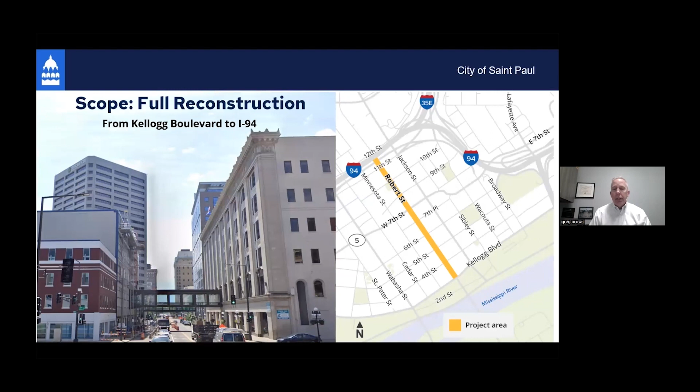Just a brief overview in case you're not familiar with the project: the Robert Street Reconstruction Project is a full reconstruction from Kellogg Boulevard to I-94, right through downtown St. Paul. That means basically starting from building face to building face, removing the sidewalks, curbs, and pavement, and reconstructing all of those elements.

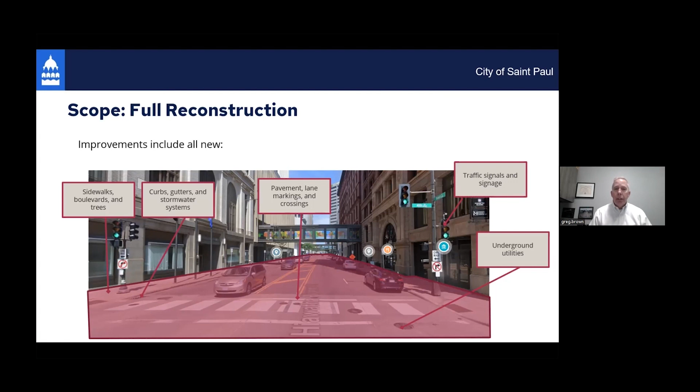In the process, we'll be updating underground utilities, both on the public side—things like sanitary sewer, water main, and storm sewer—and private utilities like Xcel Energy, Lumen, and other communications entities. We'll take advantage of the project to update their facilities and improve access and capabilities within the downtown corridor.

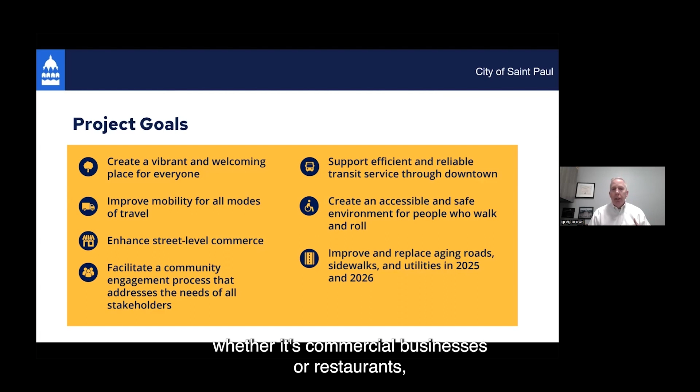The City of St. Paul has developed 7 key project goals. We would like to create a vibrant and welcoming place for everyone. We want to look at all the modes as far as function—pedestrians, transit, vehicles, trucks, etc. For street level commerce, whether commercial businesses, restaurants, or other entities on Robert Street, we want to enhance how they can function with the street or how the street can serve them.

We want to engage the community—this presentation is part of that. We want to make sure the community understands what the project can do for them, and we want to understand what issues, concerns, or improvements the community may have through the course of the project.

Transit is a big part of downtown St. Paul and Robert Street in particular. The project wants to support and enhance how that operates in the city.

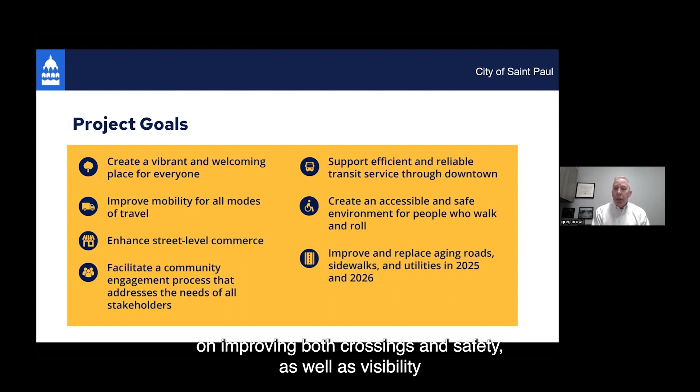A lot of our streets, not just in St. Paul but other urban areas, can be improved from the perspective of people with disabilities and accessibility challenges. The project will focus on improving crossings and safety, as well as visibility of pedestrians and people moving about the corridor to improve general safety.

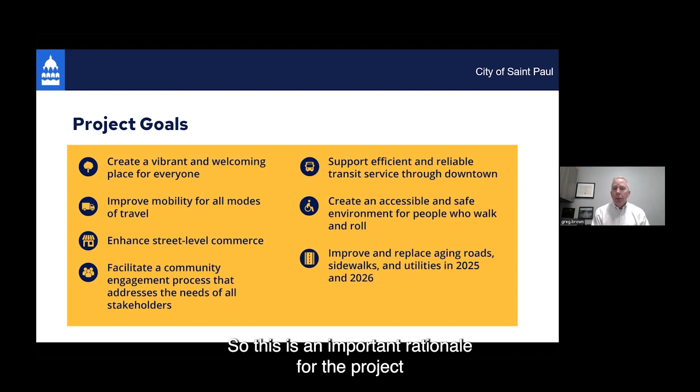Last but not least, Robert Street has not been reconstructed in any meaningful or holistic way for decades. This is important rationale for the project and will be incorporated at its core. Everything will be replaced on the surface from a pavement and sidewalk perspective, and underground facilities will be replaced as necessary to bring them up to date.

There are 4 city priorities we'd like to highlight: transit, which I alluded to in the goals; the pedestrian experience; positive partnerships—we want this to be a collaborative process with the community, stakeholders, and property owners; and climate resilience, which is an overall city goal that anything we do now with public works projects, we want to keep in mind and incorporate into our design thinking.

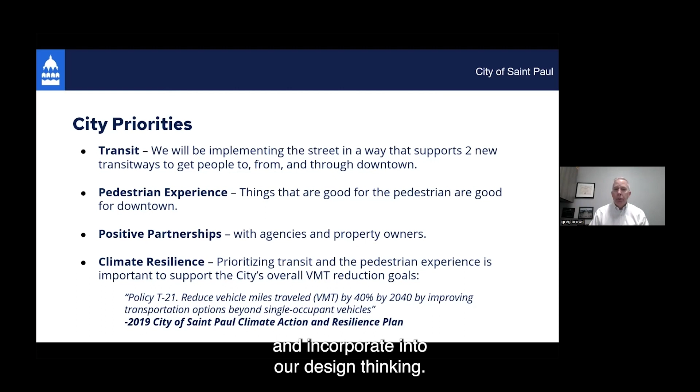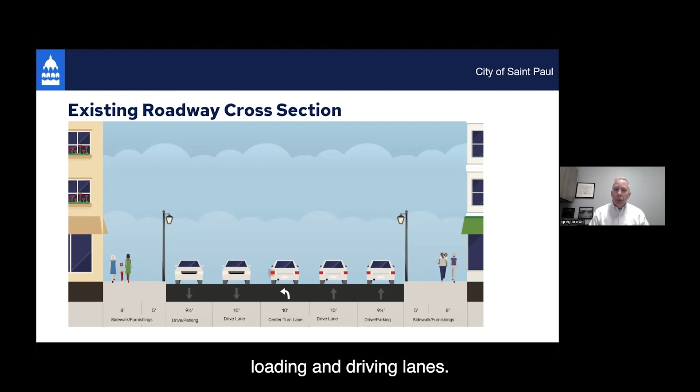Just a brief synopsis of the existing conditions: the existing roadway is configured generally as 5 lanes throughout most of the corridor. The center lane is a turn lane, the next two lanes are northbound and southbound, and the outside lanes are a combination of parking, loading, and driving lanes—sometimes off-peak parking and on-peak driving, but generally a combination of purposes.

Beyond the curb, from the building to the curb, is typically about 13 feet throughout the corridor, generally paved sidewalk area. There are some landscaping enhancements throughout the corridor, but it's generally sidewalk space that's utilized in that area.

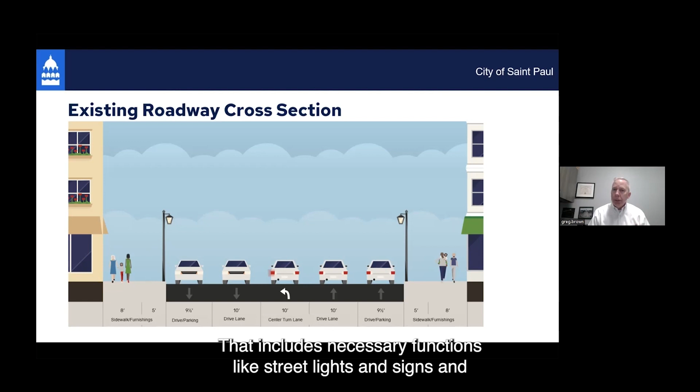That includes necessary functions like streetlights and signs, and miscellaneous elements that you'll find in the urban environment. So this presentation wants to outline 3 general design options that we'd like to get feedback on for Robert Street.

We'll go over those options in a minute, but I want to bring up a couple points to consider as we move along. This is very early—really our first exposure to the public of these 3 basic options. Things like lane widths are still in flux, exactly how the curb and gutter is designed, and traffic management details including parking bays, pull-outs for transit stops, lengths of turn lanes—all those things are details that will be fleshed out.

The intent of this overview and this session of feedback is to really think about the basic building blocks of the alternatives we're going to talk about. As we move forward and gravitate maybe towards one or two of these alternatives, we'll be looking at some of those finer points of lane widths and things to better fine-tune the alternatives.

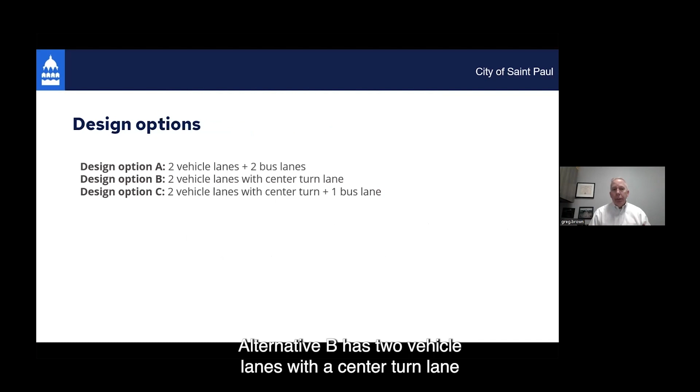So we've identified them as alternative A, B, and C. Alternative A includes 2 vehicle lanes and 2 bus lanes. Alternative B has 2 vehicle lanes with a center turn lane. Alternative C is really a hybrid of A and B—it's got the 2 vehicle lanes with a center turn lane, and then 1 bus lane, which we're depicting in the northbound direction.

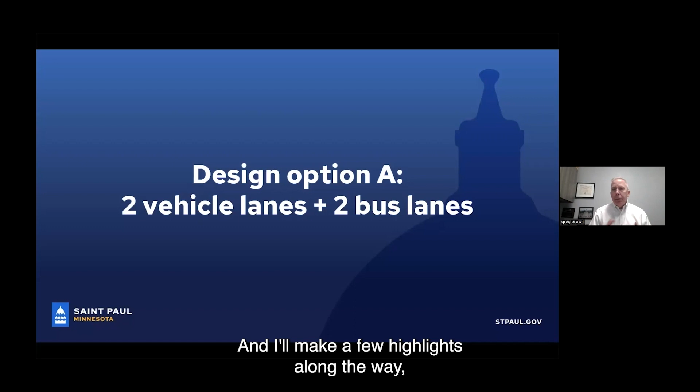So the next series of slides is a series of cross sections and plan views, block by block, of design option A. I'll make a few highlights along the way, but I invite everyone to utilize the materials on the website to look at more details from your perspective.

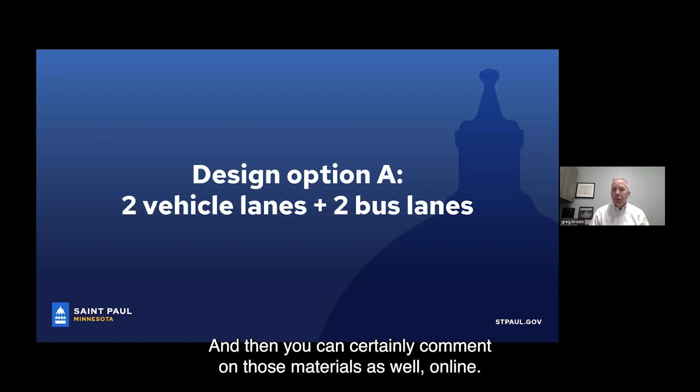If you're a building owner or resident who lives on the corridor, you might be more interested in the block from 10th to 11th and the southern blocks, and you'll be able to zoom into that if you look at the online materials, and you can certainly comment on those materials online. So we're going to work our way from north to south in all these options.

So I mentioned option A is a 4-lane design. The center 2 lanes have a northbound and a southbound traffic lane. The outside lanes are dedicated for bus traffic, and they're also allowed for use as right-turning lanes for right-turning vehicles.

Then the space beyond those bus lanes is a combination of things. It could be used for pedestrian walks, sidewalks, which would certainly be one of the functions. It could be used for transit stops, shelter platforms. It could be used for green space, maybe the addition of trees, bike racks, or things like sidewalk cafes. There's already some of that currently between 9th and 10th along the Rossmor frontage. So it's a variety of uses.

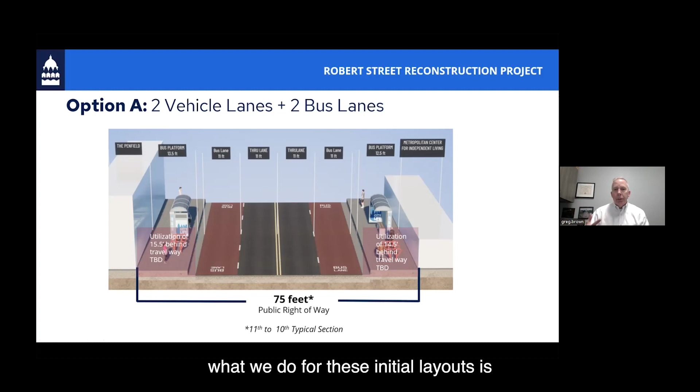I bring that up in that what we do for these initial layouts is probably a little simplistic and general in nature, but in any given block we could do different things in the space behind the traveled way. Some options might have a little bit more room, or some blocks might have a little bit more room than others on those. Parking and loading is another feature of those spaces that we would accommodate.

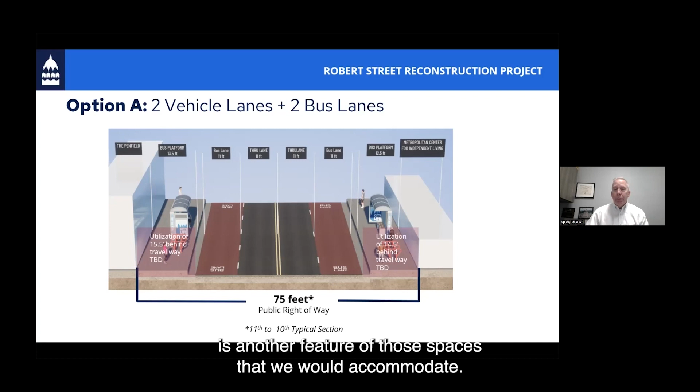And you'll see throughout these layouts some potential parking and loading areas that we've identified, playing off of existing uses that are in those locations.

This first example, which again we're working our way north to south, 11th to 10th—it's got a lot of information on it. That's why I encourage everyone to use the website to do a more thorough look, but I want to highlight a few things that will be helpful as you navigate through these.

The main roadway itself generally will have gray hatching for traffic lanes. It will have the salmon color if there's a dedicated bus lane in an option. Transit platforms that we know will be incorporated in some shape or form, not necessarily as depicted here, but in these general locations, are the light blue color.

Behind the curb, we have two general colors. We have a cream color, which represents a clear walkway—one that doesn't have lights or other impediments, trees, those kinds of things in it. The tan color represents the area we call an amenity zone, and those are spaces that could be used for all kinds of things like lighting, bike racks, trees, green space, water quality features. That's kind of undefined at this point, other than the fact that we've identified approximate spaces that can be used for it.

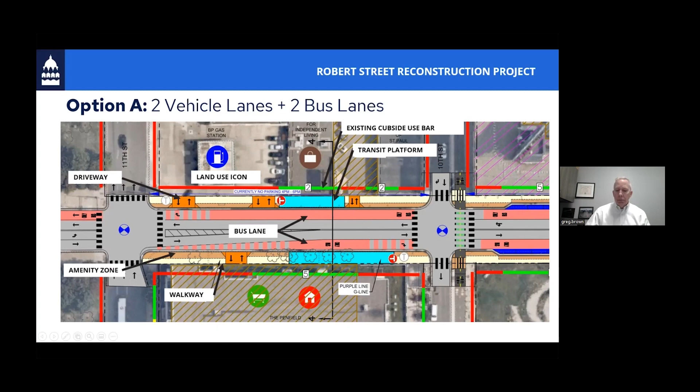We also generally envision reconstructing a little bit into the side streets, in this case 10th Street, so you'll see some coloring on those side streets, and the exact extents will be determined as we go along. Now that I've covered the orientation, we'll try to move a bit faster, knowing you can come back to this recording or go to the website to zoom in on details.

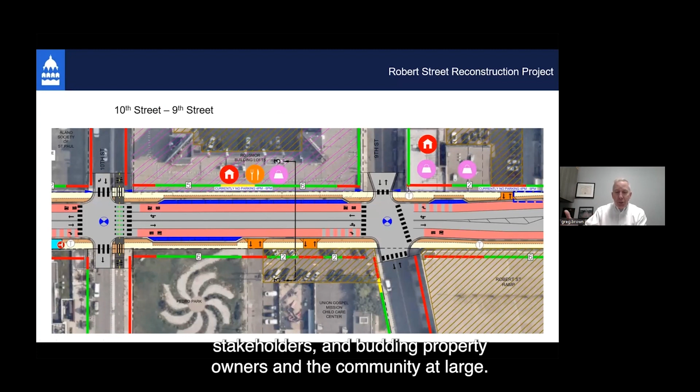In the case of a parking bay here, you can see the walking space gets a little constricted compared to the other side of the road. So these are all kinds of trade-offs and comparisons we'll be looking at with our partners, both stakeholders and abutting property owners and the community at large. There are a lot of interesting opportunities the project presents to the community, and those are the things we really want feedback on during this stage of engagement.

So this is the plan view section of that block. Something I want to point out here is this deep blue hatching, which represents a potential parking bay or loading zone. In this case it's just depicted as the same color, but it could be delineated however people want. It could be smaller than this, or it could be removed entirely to present more space for sidewalk cafe, say in the Rossmor block, or other uses.

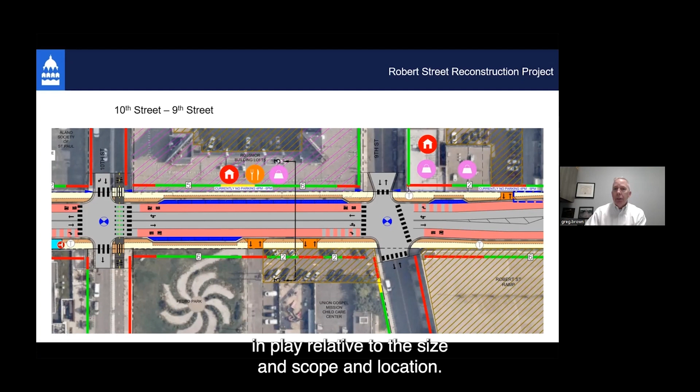So those are things all in play relative to size, scope, and location. But we wanted to depict some of those to get feedback and comments from people on what might be more important than other things.

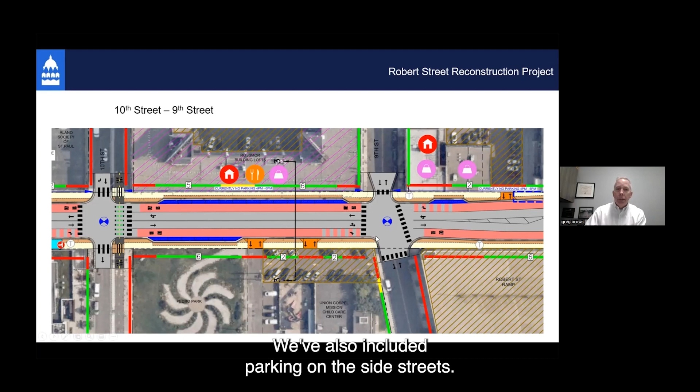Again, here's a bay where the parking and loading zone is. In the case of this block, the center of the block on the east has some loading zone and short-term parking on it. We've also included parking on the side streets, so you get a sense of what might be happening in those locations.

So working our way south, the next block between 9th and 7th includes the four-lane section as before, with a very similar configuration on the sidewalk. Again, we've shown a parking bay on the east side to see how that might relate. And this is that section in plan view, with a little bit of the parking bay depicted here.

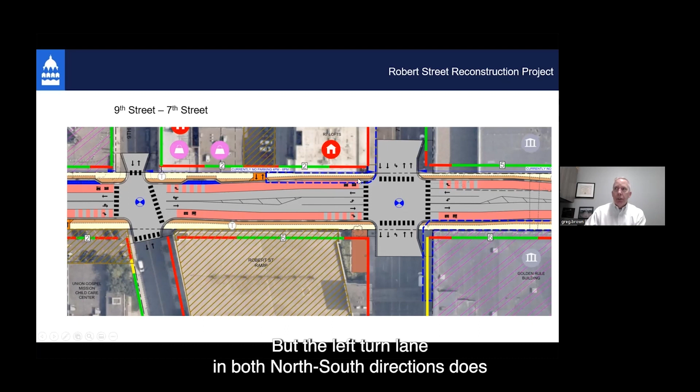Something occurring in this layout as we approach 7th Street is a widening of the roadway to account for a left turn lane. 7th and Robert is a very busy intersection, so we feel left turn lanes are going to be important to keep traffic functioning. But the left turn lane in both the north-south directions does add stress to the sidewalk and pedestrian environment.

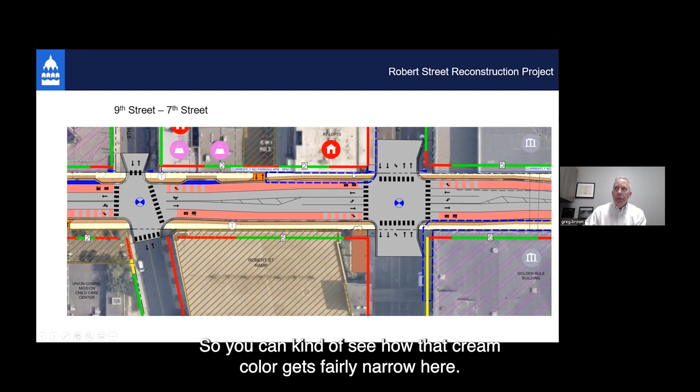You can see how that cream color gets fairly narrow here. We have it somewhat consistent here, but the tan area gets a little bit narrower. That's a trade-off we need to understand more as we go forward on the 7th and Robert intersection. In this particular option, there generally aren't left turn lanes, so this is a case where things are a little different than the normal option A footprint.

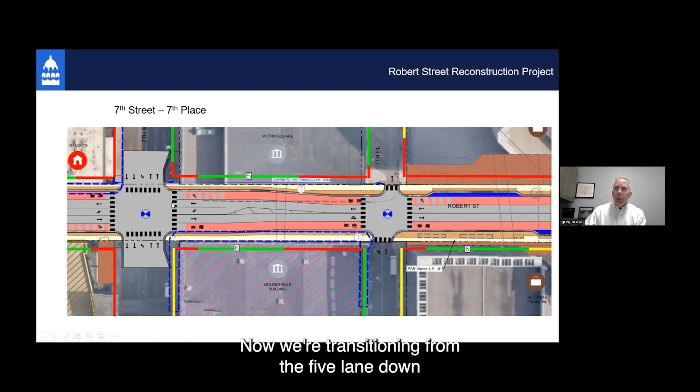Continuing south, this is the left turn lane approaching 7th here depicted. It's in effect a 5-lane section, with walkways and amenity zones on either side of the roadway. This is that block in plan view. Now we're transitioning from the 5-lane down to our standard option.

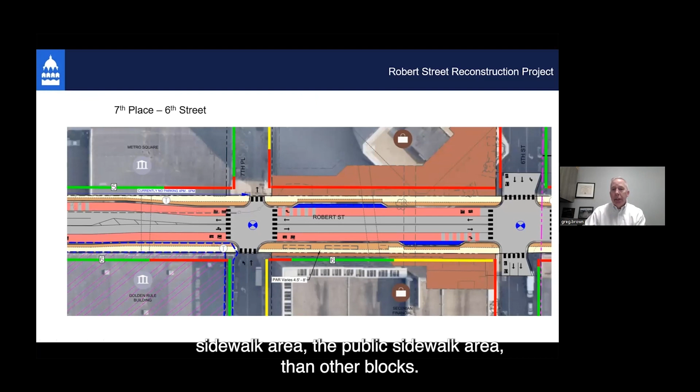The next block south, 7th Place to 6th Street, is fairly consistent on the main core layout, but depicts a parking bay on the east side. Something of interest in this block is that the Securian properties on both east and west are a little more set back from the public sidewalk area than other blocks, providing a more spacious feel from a pedestrian's perspective than blocks with buildings right on the corner or property line.

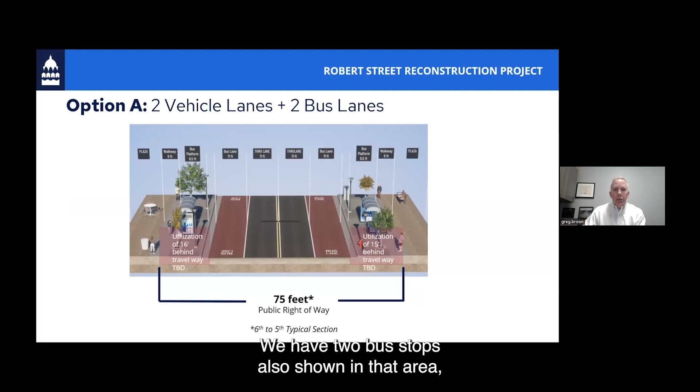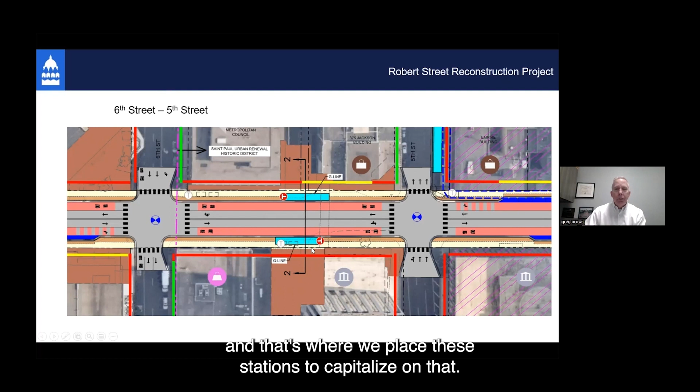We have 2 bus stops shown in that area, capitalizing on that space—that light blue hatch we talked about early on, a stop identified for the future G Line transit. This darker brown represents space that's not in the roadway right of way proper, but could be utilized and currently is used for walking and pedestrian movements.

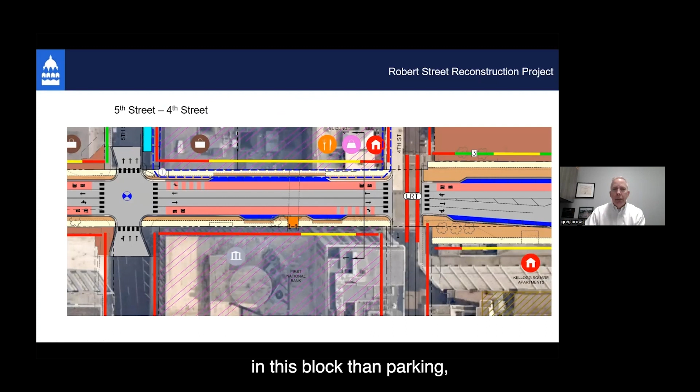So that occurs on both sides of the roadway, and that's where we've placed these stations to capitalize on that. The next block south, from 5th to 4th, is the Pioneer Endicott building and the First National Bank on either side. We've got parking bays shown here in conceptual form on each side—there's a need for that expressed along the way that does exist. Generally it's more of a loading zone focus in this block than parking, but it's something we'll be working with those property owners on and would like feedback from the community.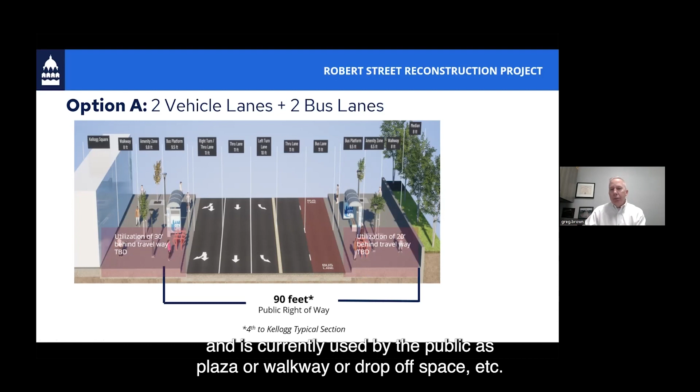Beyond the 90 feet, both sides of the road—on the federal side and the Kellogg Square side—have additional space that's usable and currently used by the public as plaza, walkway, or drop-off space. So this block is quite spacious compared to the rest of the corridor, and it's another block identified for transit stops. We have G-Line platforms shown right at the Kellogg Boulevard intersection area. That's the southern end of our project.

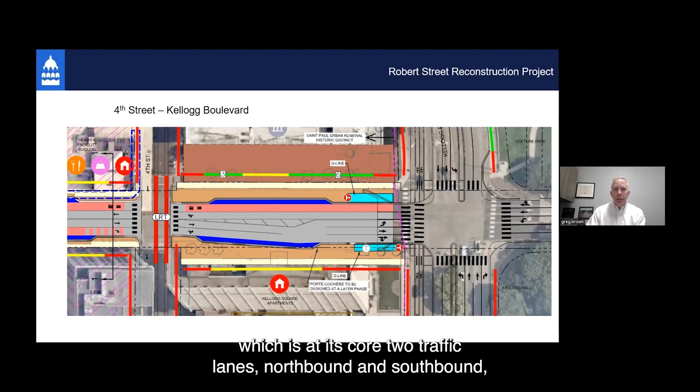As I mentioned, we go from Kellogg to 11th Street. This is option A, which at its core has 2 traffic lanes—a northbound and southbound—and 2 dedicated bus lanes. So we'll move now to option B, which is 2 vehicle lanes and a center turn lane, with no dedicated transit lanes.

The first section here is a transitional block from 11th to 10th. In this particular block we don't actually have a center turn lane because of the one-way nature of 10th Street and 11th Street, but we'll be transitioning to that in the next block.

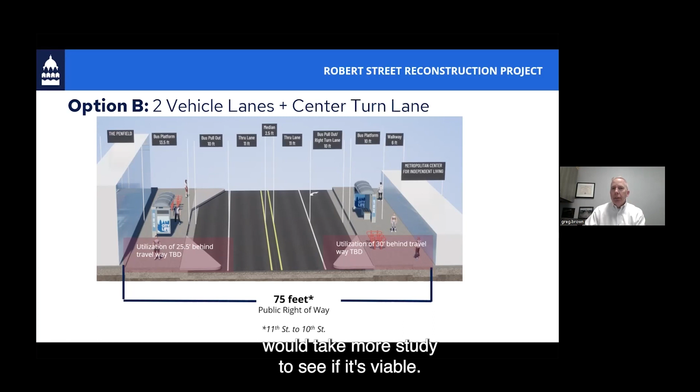We have the Purple Line and G Line bus stations and bus stops depicted here. I'd note that on this particular concept, generally at bus stops we've shown them designed with bus pullouts. That's a topic we're working and discussing with Metro Transit—it's a non-typical design for bus rapid transit, so it will take more study to see if it's viable, but we wanted to look at it to see how it fit from a spatial perspective.

This concept generally has those bus stations outside of the southbound and northbound travel way. In plan view, you can see we have the single northbound and southbound lanes, along with that narrow median depicted in the section, and we transition across 10th Street to the 3-lane core section defined by option B.

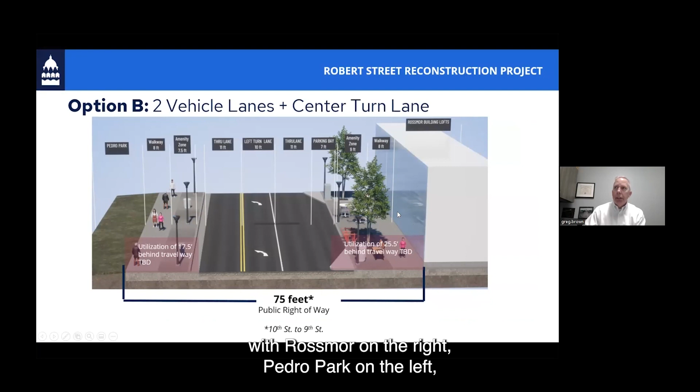So this next cross section is 10th to 9th, with Rossmor on the right, Pedro Park on the left. You can see more of the core section, and we have a parking bay depicted on the Rossmor side.

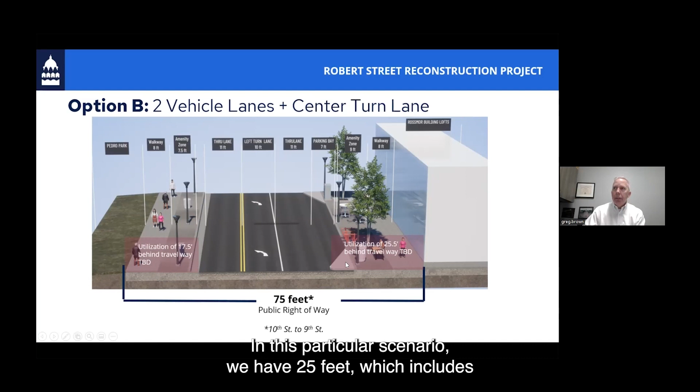One of the things you'll generally notice with option B is more pedestrian space from the roadway proper to the right of way. In this case, we have about 17 feet on the west side, and 25 feet on the other side, which includes a parking bay and some amenity zone. What's depicted here is chairs and tables for a sidewalk cafe and a walkway adjacent to the Rossmor building.

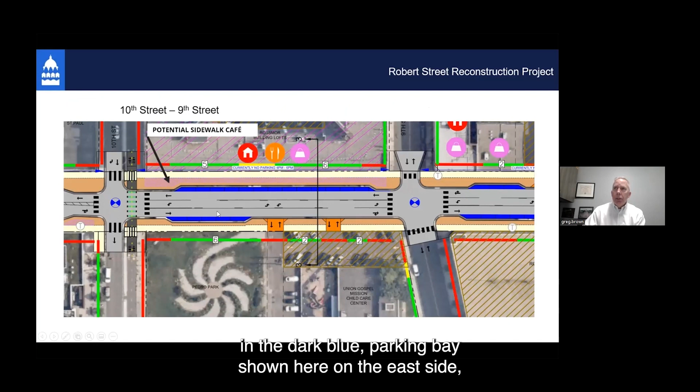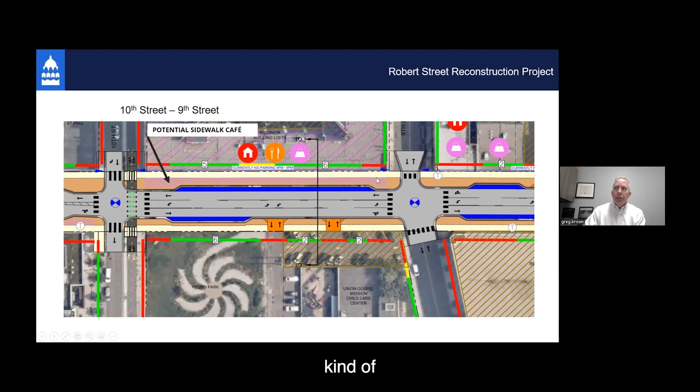So in plan view, you can see the parking bay here in the dark blue, shown on the east side. It's Pedro Park, the salmon or cream color is the clear walkway, and this hatched area is labeled as potential sidewalk cafe, but it's a fairly broad space compared to option A. That would be somewhat typical as we compare options A, B, and C. Option B generally has more space from curb to building than the other options.

Moving south, the next block from 9th to 7th, again we have our core section, parking bays on the other side, and then our amenity zone and clear walk space.

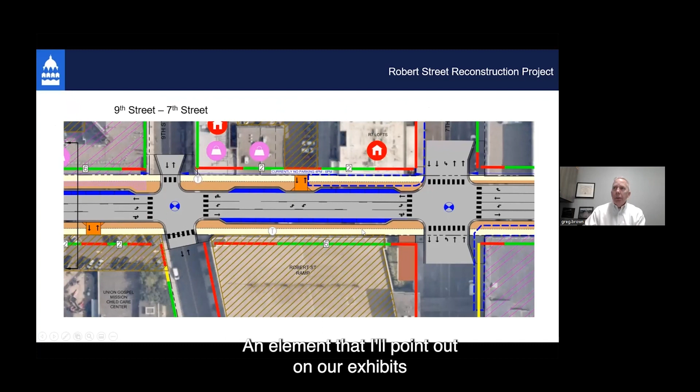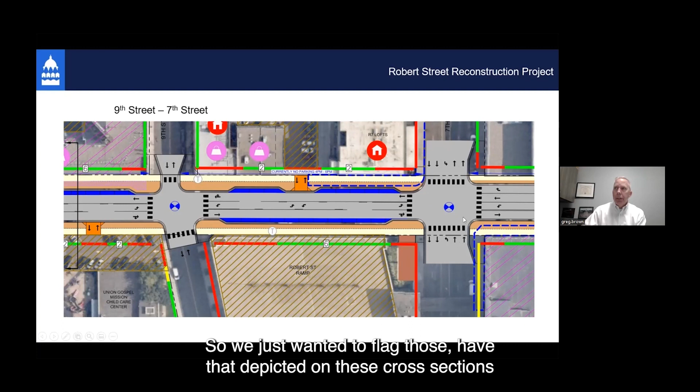An element I'll point out on our exhibits includes dark blue dashed lines in a few selected locations. Those represent things we're aware of at this point, and we're still in the process of learning from property owners, but these represent areaways, and in this case a heated sidewalk, that are elements that would present more challenge from an engineering design perspective to work around or build around. We just wanted to flag those and have them depicted on these cross sections and plan views for background knowledge.

Moving south, we are here at 7th Street to 7th Place. One of the things you'll see on the next layout is the development of a right turn lane. Just as option A had right turn lanes built in through the bus lanes but not left turn lanes, option B has left turn lanes built in but not right turn lanes.

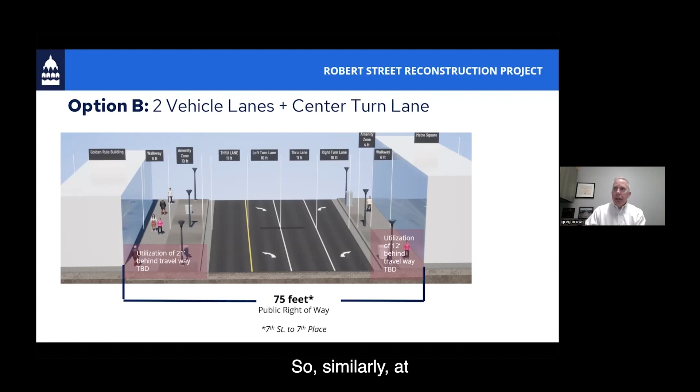Similarly at 7th Street, because of the busy nature of 7th Street, we believe we need a dedicated right turn lane. So we've actually widened this design on the northbound approach to provide that right turn lane, which is what you saw in that section. We also have one of the bus stops here utilizing that space as well.

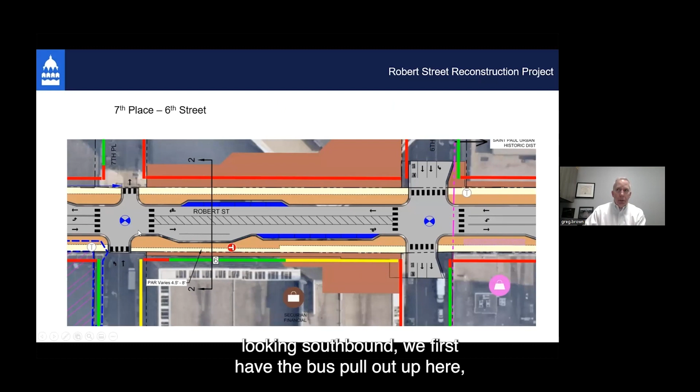The next block down, from 7th Place to 6th Street, the Securian block, has the 3-lane section, and we have parking bays and a bus pullout identified in this block. Looking at that in plan view, looking southbound, we first have the bus pullout, and then south of that we have some space shown for parking and loading. Northbound also has some parking and loading space.

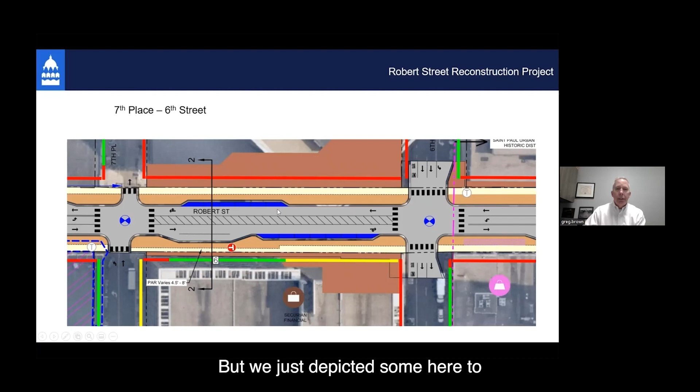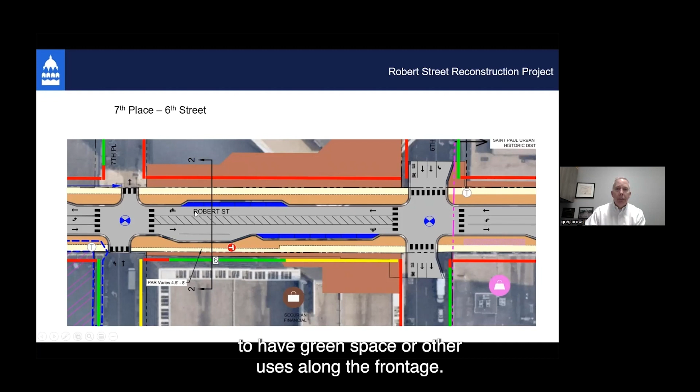There's actually no parking in the current northbound side of the Securian block, but we just depicted some here to solicit feedback, frankly, from the community and property owners to see if that has merit or if there's more of a preference to have green space or other uses along the frontage.

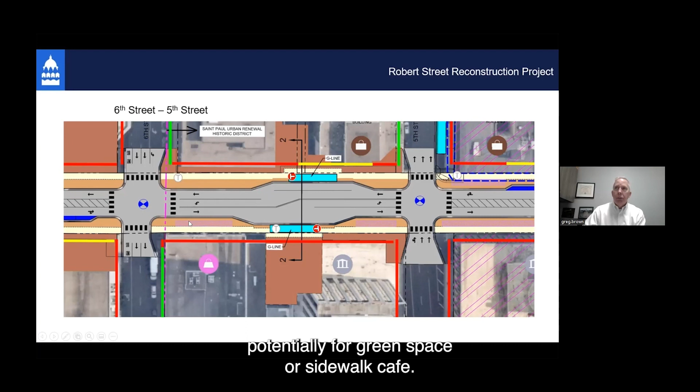The next block, similar to option A, we're capitalizing on the middle of that block with the public space that exists outside of the right of way. We have the bus stops for the G line depicted here. In plan view, you can see there's a pullout to facilitate those bus stops, and outside of that, space that could potentially be used for green space or sidewalk cafe. It's a fairly wide expanse from the curb to the building outside of the middle of the block.

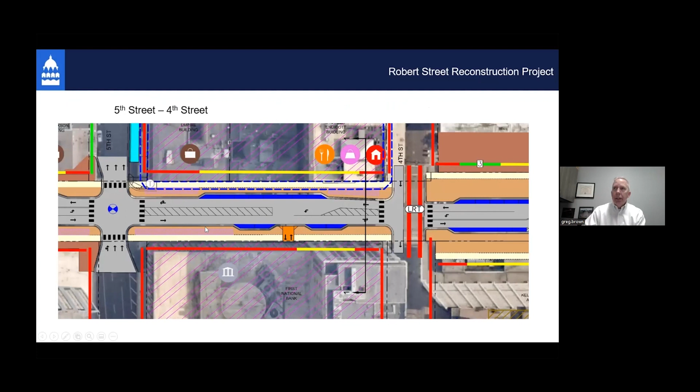Looking at that in plan view, we have some parking shown on the east side and some on the west side. Again, in this option, there's a fair amount of space between the curb and the building that could be used for multiple functions, including cafes or just additional green space, etc. That's depicted by these light purple hatches.

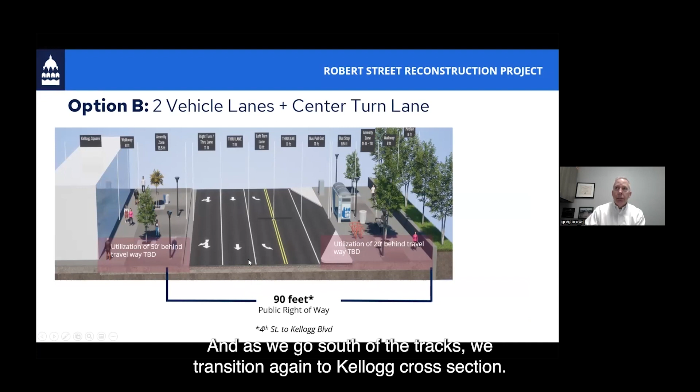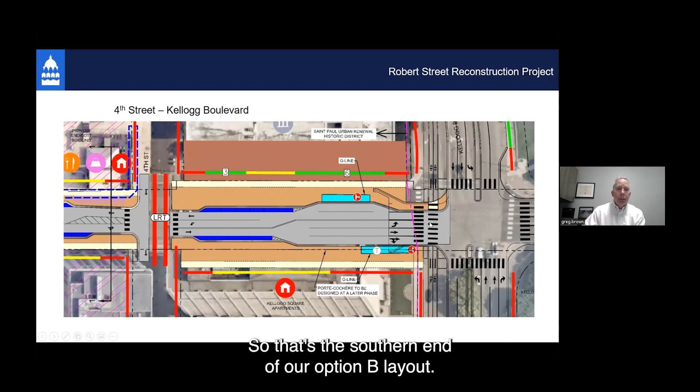As we go south of the tracks, we transition again to the Kellogg cross section. So this block, just like in option A, is a little bit different than the others. We transition here, and we do have our 2 transit stops at Kellogg. We have our lanes, both a through-left and a through-right on southbound, and a single through northbound depicted in this option, along with some parking or drop-off space that could be allocated on either side. So that's the southern end of our option B layout.

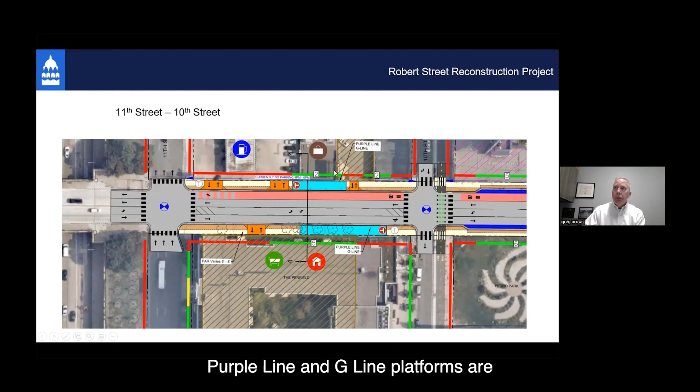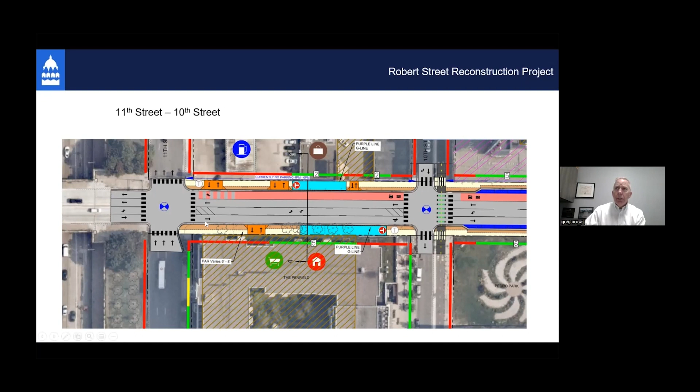The third option is option C. As I mentioned, that's kind of a hybrid of A and B. It's got a 3-lane general purpose traffic design and a single northbound bus lane in this concept. We could consider that bus lane to also be southbound, but we've depicted it northbound for the purposes of this discussion. In our first block, working from 11th Street south, you can see again the 2 purple line and G line platforms, very similar to option A. A lot of things in option C are very similar to option A from a spatial perspective. The general curb dimension, curb to curb, is very similar, so a lot of the same benefits and impacts or considerations can apply from A to C.

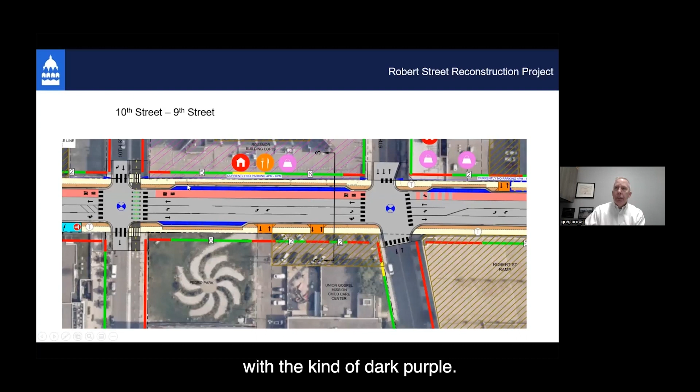This is the next block with option C, Pedro Park and Rossmor. In plan view, we have depicted some potential for parking on the east side. You see that here with the dark purple. We've also shown a little bit of that on the west side as well. Similar to option A, when we have the parking introduced, it reduces that through walk space. You can see how that cream color kind of tapers or narrows a little bit in those areas.

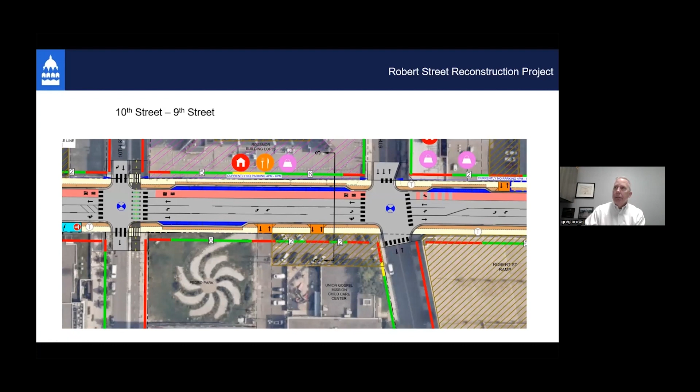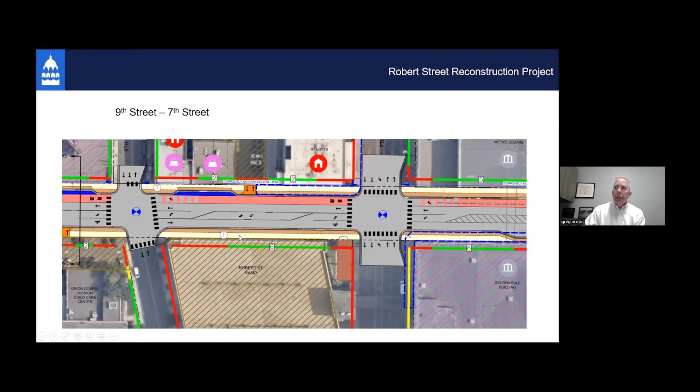The next block from 9th to 7th is similar again. We have our core 3-lane with the bus lane. In plan view, we have a little bit of parking here that we've depicted on the northern end of that block on the east side. Otherwise, it's fairly consistent with the section as depicted. And I mentioned earlier, the scale, location, and size of any parking depicted here is all really preliminary and is intended to get feedback and comments. So the fact that we depicted it here doesn't mean that it has to be there. It just means it's an area that we identified that could work, but we may get feedback to say they'd like it better on this side, or not at all. There might be some other uses for it. So that's just something to always keep in mind as you look at any of these concepts.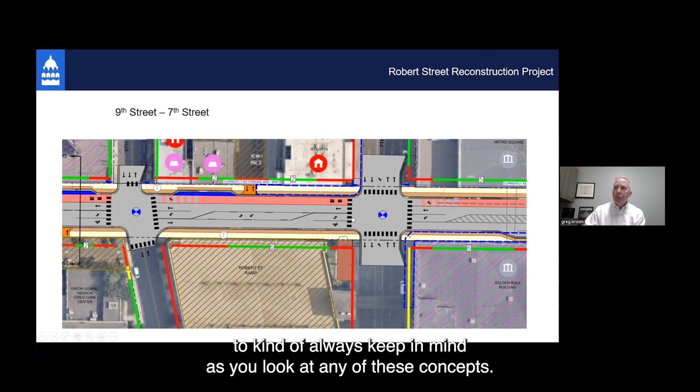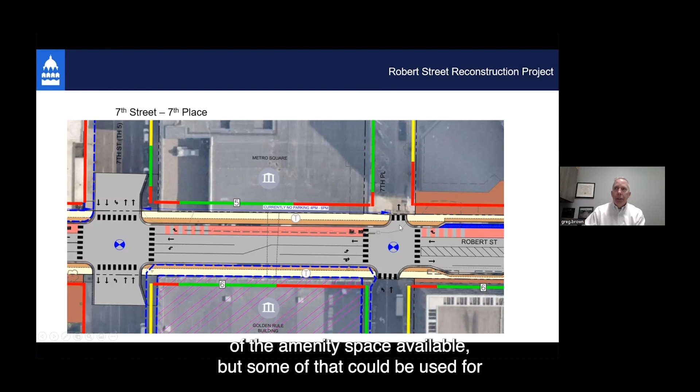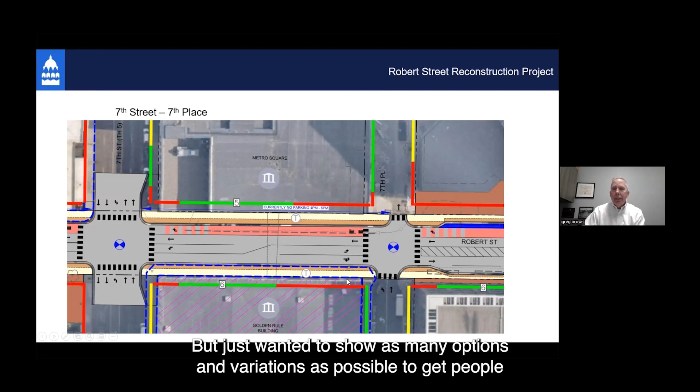The next section, working our way south between Golden Rule and Metro Square, 7th Street to 7th Place - the roadway section is pretty consistent with the northbound bus and the 3-lane design. In this particular block, this is a scenario where we didn't have parking, so you can see there's more amenity space available, but some of that could be used for parking if that was a consideration or desire as well. We just wanted to show as many options and variations as possible to get people thinking about the trade-offs and pros and cons of that space behind the curb.

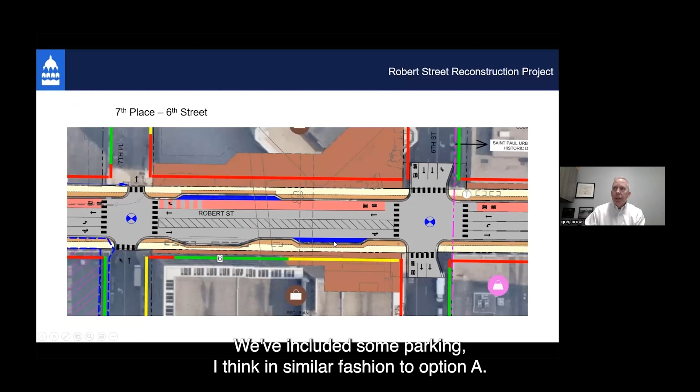The next block is the Securian block. Again, we have the benefit of some of that open space feel adjacent to the corridor. We've included some parking, I think, in a similar fashion to option A. And this first pullout would be a bus pullout and local bus stop in this area. So very similar in a lot of ways to how the option A preliminary footprint is depicted.

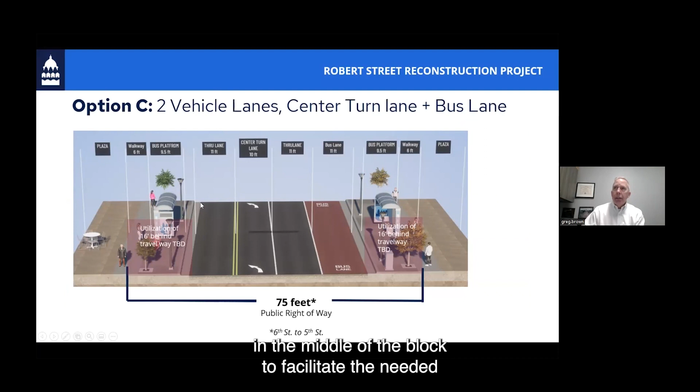The next block, from 6th to 5th, again takes advantage of the public space that exists in the middle of the block to facilitate the needed G-line bus platforms. So in this case, the northbound bus stops in the bus lane, and the southbound bus would stop in traffic here for the G-line stop.

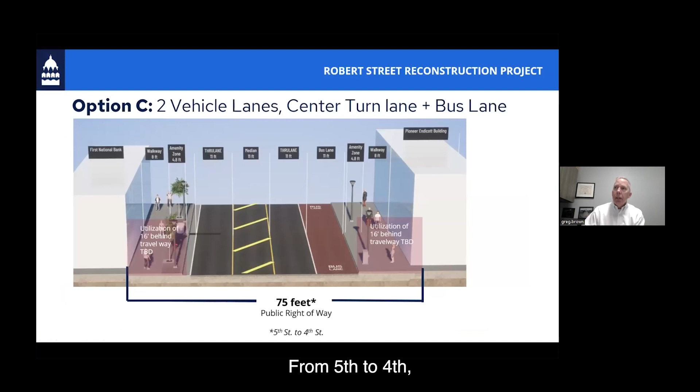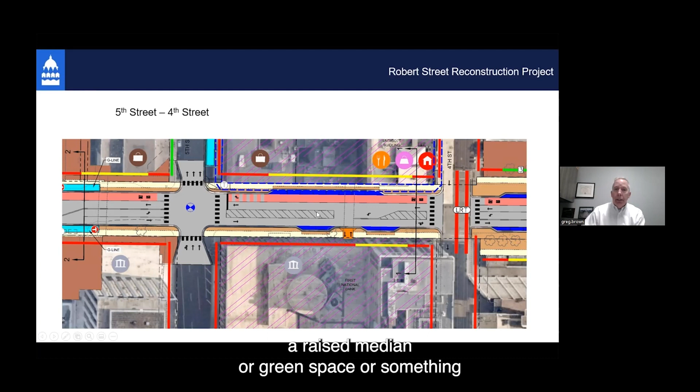From 5th to 4th, that's the Pioneer Endicott, First National Bank block. Roadway section is, again, our consistent section. We've identified, similarly as well along with the other options, some space that could be used for parking or drop-off on both sides of the roadway in this block. And this median space, similar to my comment on option B, could be delineated as a raised median, green space, or just a striped median like it is today.

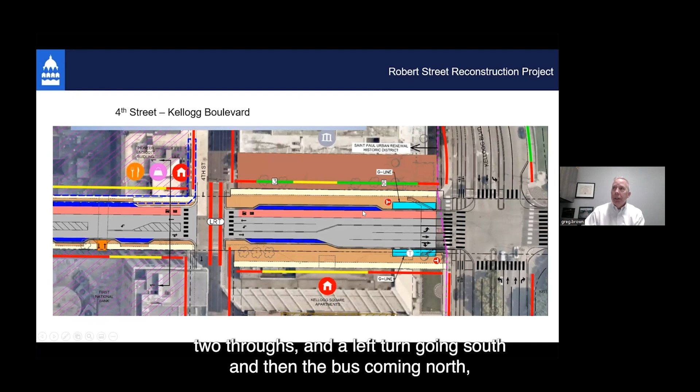And working our way south to the last block, from 4th Street to Kellogg - again, kind of a transitional block, a little different than the others. We transitioned to 5 lanes here at Kellogg, where we have two throughs and a left turn going south, and then the bus coming north and a through lane coming north.

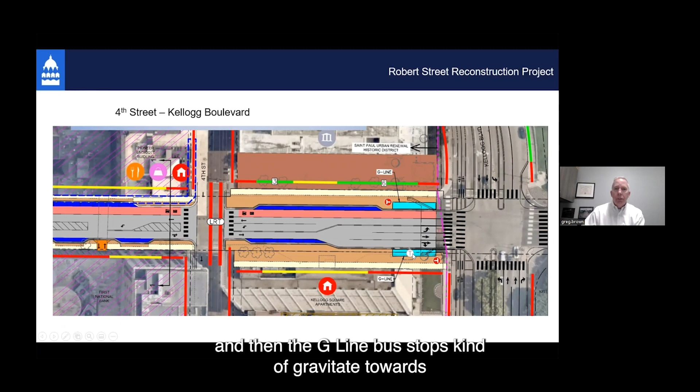Again, with some parking depicted on both sides, and then the G-line bus stops gravitated towards the Kellogg Boulevard intersection. So that's option C at the tail end.

Just to synopsize the primary relationships between options A, B, and C, we put together some general themes related to that. This is also depicted on the website in the survey to help you remember what the differences are. Design option A includes a slightly shorter vehicle travel time compared to design option B, but a little longer travel time than the existing condition. The transit travel time is shorter than the existing condition, as you'd expect because of the dedicated transit lanes, and it's shorter than the other concepts.

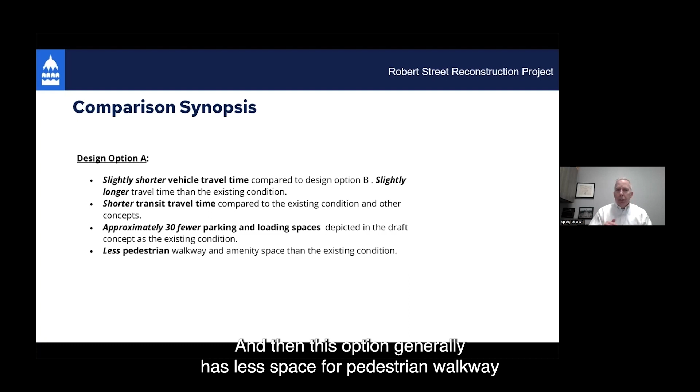As depicted, the parking and loading can change based on input and feedback we get, but as shown in the options, there's about 30 fewer parking and loading spaces than the currently existing corridor. This option generally has less space for pedestrian walkway and amenities, as depicted when showing the parking bays and loading. If those were to turn into pedestrian space, it'd be about comparable to existing.

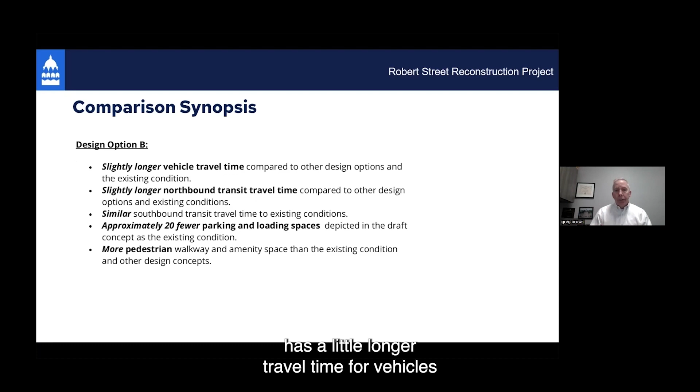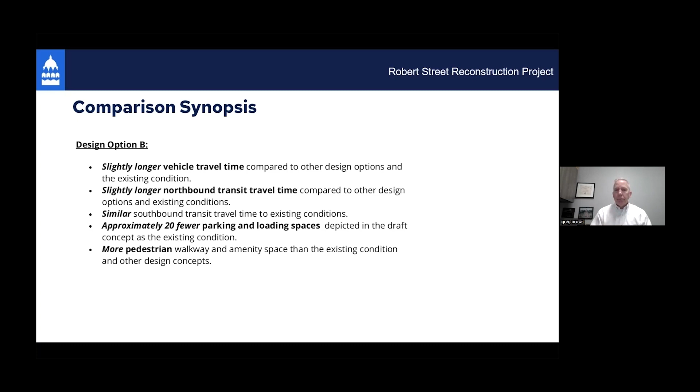Design option B has a little longer travel time for vehicles compared to the other design options and existing conditions. The northbound travel time is a little longer than existing conditions and other design options, but the southbound transit travel time is comparable to conditions today. This option has about 20 fewer stalls, parking and loading spaces, as depicted compared to the current condition, but again it's based on the draft concept we've depicted here. This has more pedestrian and walkway amenity space, quite significant compared to both the existing condition and the other design concepts. It's probably one of the biggest takeaways on option B.

Option C, from a travel perspective, has a little shorter northbound travel time for vehicles than the other options, but a little longer southbound travel time compared to the other options and existing conditions. From a transit perspective, it's a little shorter northbound, as you'd expect with the dedicated transit lane, and comparable on southbound transit travel time to the existing condition. Similar to option A, there's about 30 fewer parking and loading spaces than the existing condition, and it has a little less pedestrian walkway amenity space than existing when considering the parking and loading depicted. If those spaces turned into pedestrian and amenity space, it would be pretty comparable to existing.

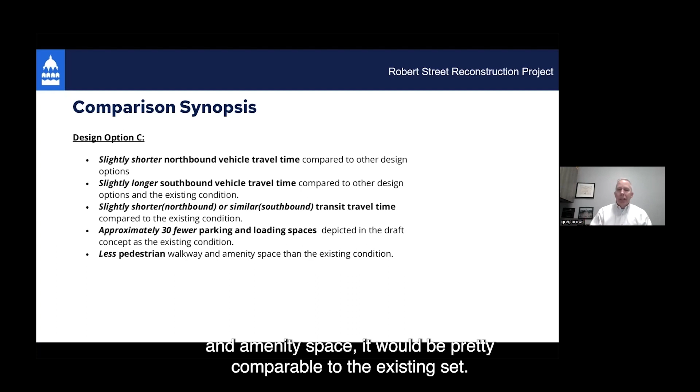So that gives, hopefully in a nutshell, a comparison between the three concepts or options that we walked through.

As far as the project timeline, we're relatively early in the life of this project, just at the beginning of concept development and feedback. We're hoping between now and early summer that we'll take these three concepts we looked at today and refine each of them in varying degrees, coalescing around a preferred concept with the community at large, stakeholders, property owners, and agencies. We'd like to have that happen in early summer.

At that point, we will transition into a more heavy engineering focus, and that's this part of the schedule here. Some utility work will start in 2024, and some will actually begin in 2023. Utility work in a downtown environment really never ends, frankly, but utility work geared toward getting ready for Robert Street would begin in earnest later this spring and into the summer. The first entity will be Xcel Energy doing some work there.

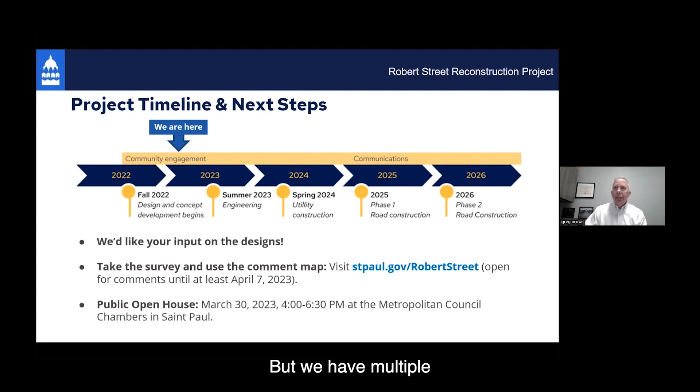There is a public open house where all these options will be presented, and members of the design team, including myself and the city, will be there to answer questions directly and get your feedback. We'll have large layouts and roll plots to help zero in on things. That's March 30th from 4 to 6:30. We hope as many of you as possible can join us there and share your feedback, but we have multiple options on the website as well to do that.